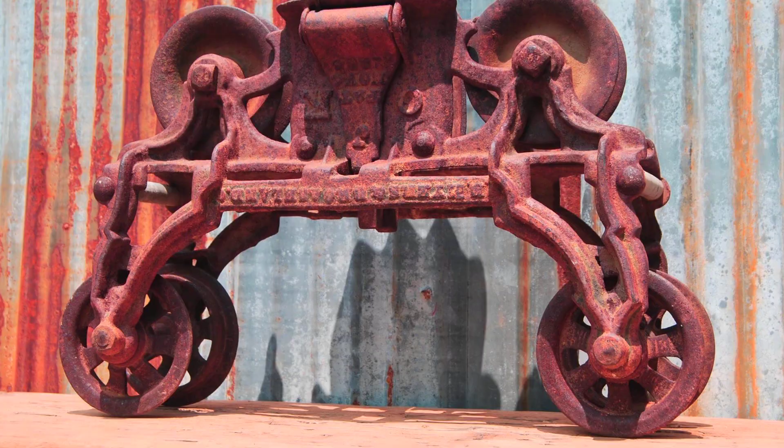It's July 22nd, 1904. In the heart of Gary, Indiana's steelworks, a 300-ton iron crane shudders across its rails, hoisting a cauldron of molten steel, 2 million pounds, burning at 2,800 degrees Fahrenheit, 45 feet above the shop floor. You feel the heat even from below. The air ripples. Trolley wheels hammer overhead, rivets straining.

Without warning, something snaps, a groan, then a roar. The load drops. In seconds, incandescent metal floods the floor, swallowing men with nowhere to run. 22 gone, 48 more burned or broken. The Iron Beast was built for progress, but one glitch turns it into a weapon. How did a machine meant to fuel entire cities become the deadliest thing in the mill? And why did anyone stand beneath it at all?

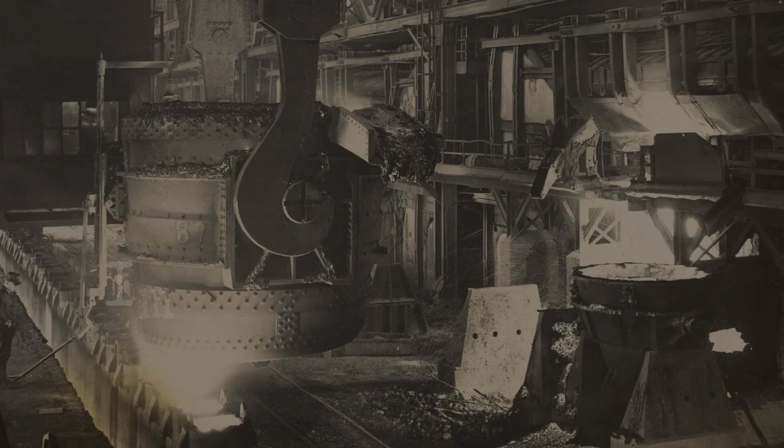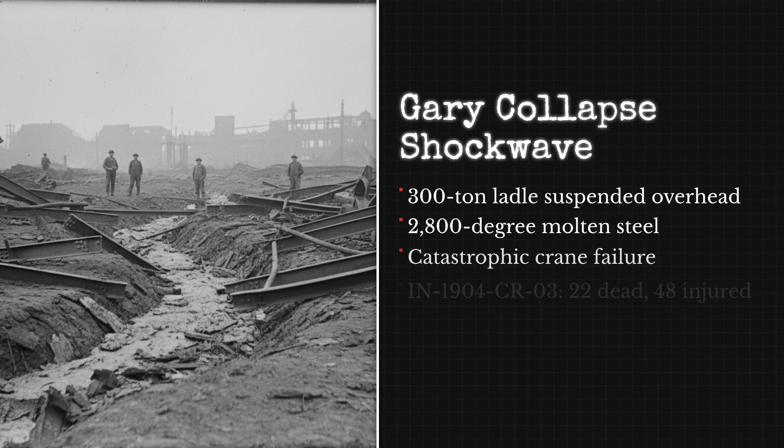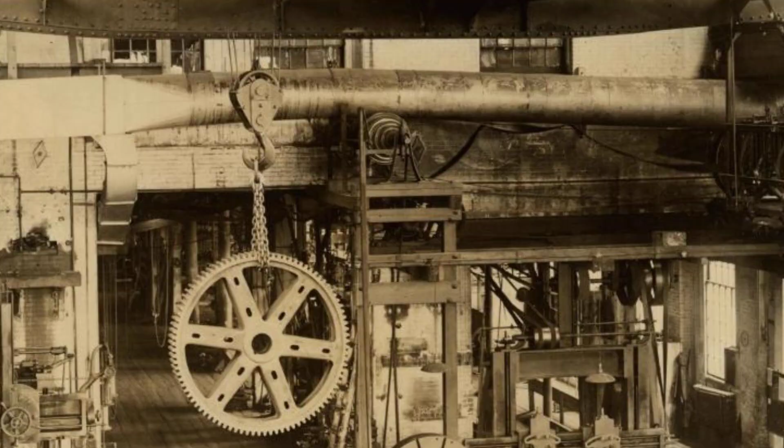A 300-ton ladle, holding 2 million pounds of molten steel at nearly 2,800 degrees, hung 45 feet above the Gary Mill floor. On the day the crane failed, the official record IN-1904-CR-03 counted 22 dead and 48 injured. The floor became a scorched wasteland, concrete shattered and blackened where the steel poured out. The crane, designed as the mill's backbone, became the instrument of disaster in seconds.

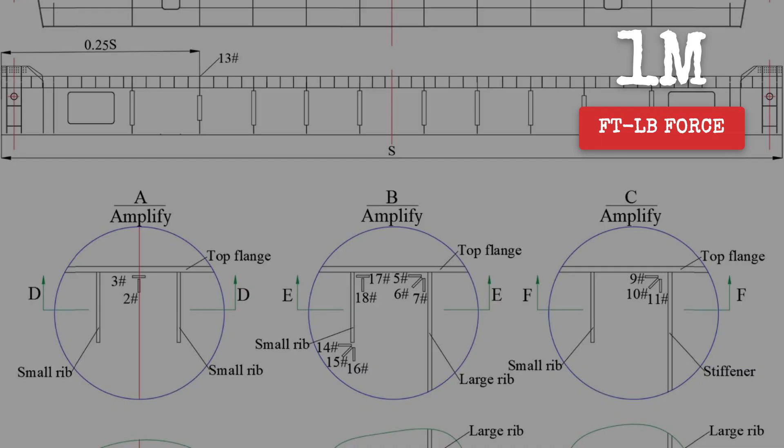Trust in machines was a necessity, not a choice. Early 1900s Iron and Steel Institute reports are full of numbers: 80-foot booms, 60-foot swing radii, cables thick as a man's wrist. But when the Gary crane collapsed, those statistics became flesh and blood. The board's calculations, published in June 1905, measured the ladle's fall at over 1 million foot-pounds of force, the impact of a small artillery shell, unleashed on a crowded shop floor.

There was no warning. The only sign was a groan from the boom, described by one survivor as the whole building taking a breath. The latch, worn by years of heat and vibration, failed. The load shifted. The crane's safety factor, set at 1.5, was never meant for such a surge. Riveted joints, 3/4 of an inch thick, ASTM A7 steel, sheared instantly. Rails buckled, trolley wheels jumped track, and the molten steel crashed down.

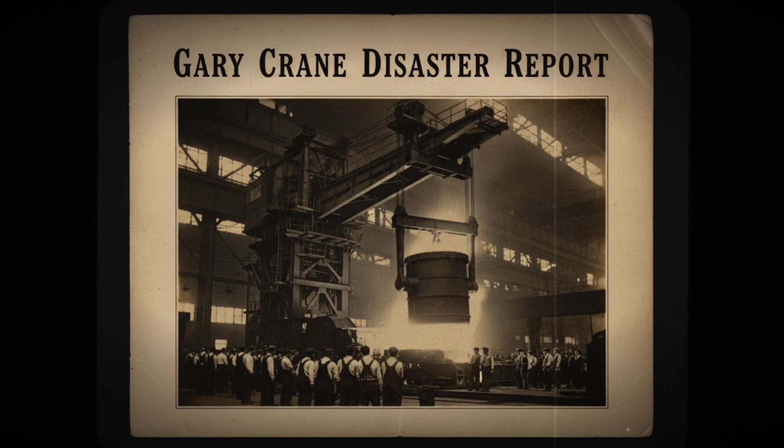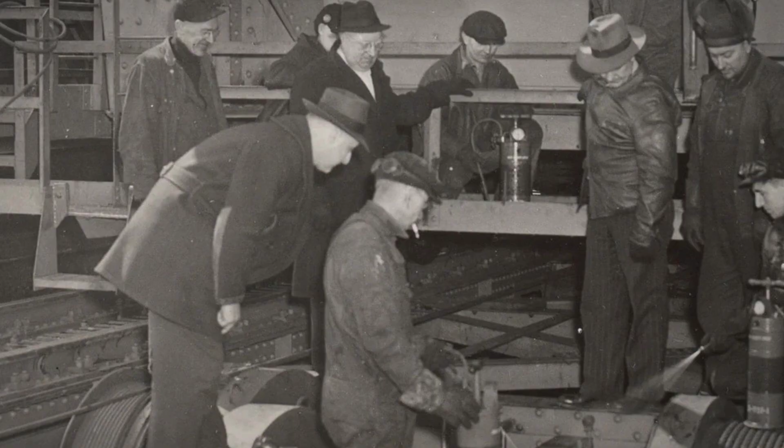The Gary report is relentless in its detail. Every casualty is listed: name, age, position, cause. The heat alone burned men 20 feet away. For those beneath the ladle, there was no escape. The casualty table from IN-1904-CR-03 stands as a grim ledger, each line a life ended or forever changed.

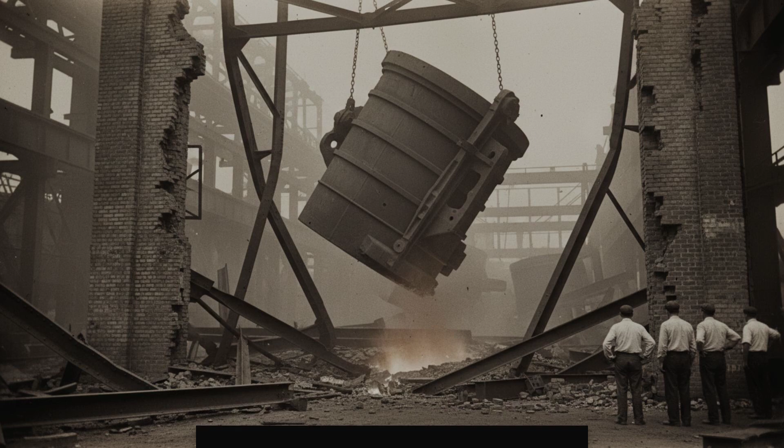John E. McDonough, first investigator on the scene, wrote, 'The iron had no mercy. It moved like a river, but it burned everything it touched.' His words, preserved in the board's annex, capture the aftermath with a clarity that leaves nothing to the imagination. Steel meant for bridges and railways instead erased lives in an instant.

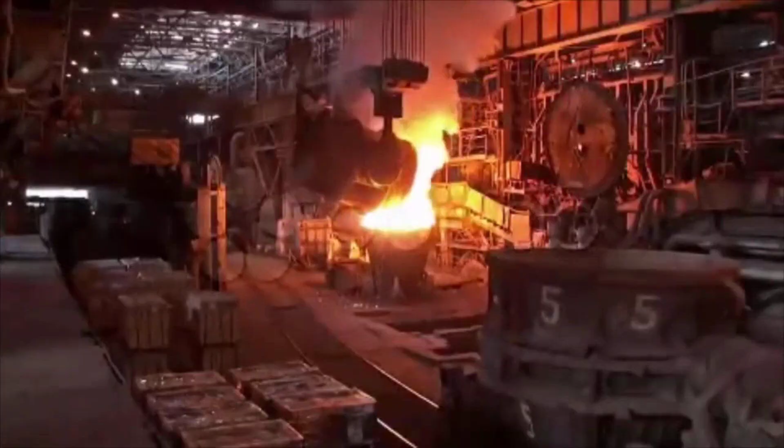Why did so many stand beneath the Iron Beast? The mill's rhythm demanded it. Production never stopped. Every minute brought a new pour, a new rush. The men trusted the crane because they had to. There was no other way to move that much steel, no other way to feed the city's hunger for rails and beams. The cost of progress was measured not just in tons, but in bodies.

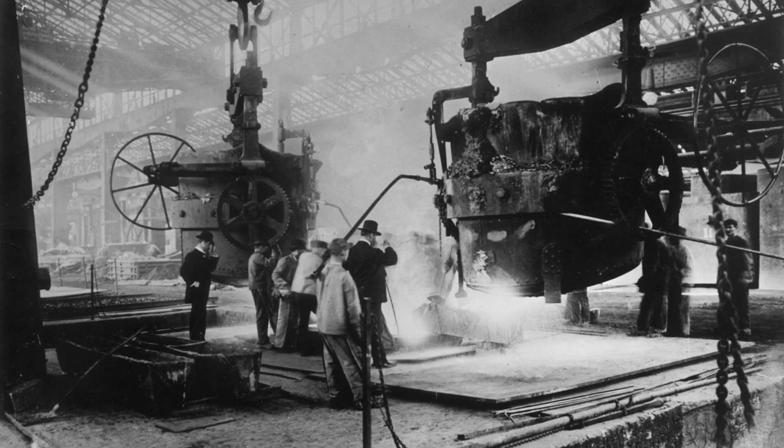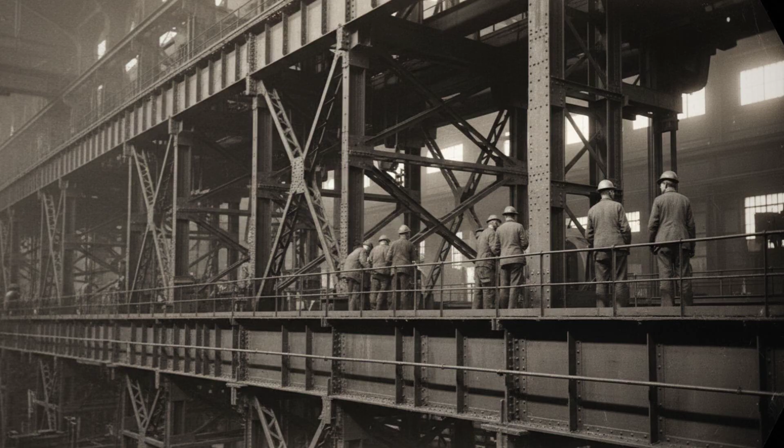The ladle crane dominates the casting bay, an iron bridge spanning wall to wall, built for one purpose: to move staggering weight through a furnace-bright world. Its structure is as straightforward as it is unforgiving. The gantry, fixed rails bolted high above the mill floor, runs the length of the bay. Each rail is riveted steel, every joint a test of time and heat, each seam a silent question mark.

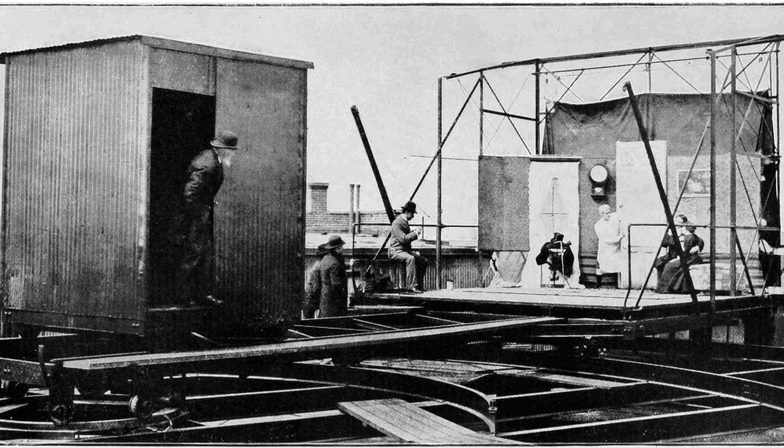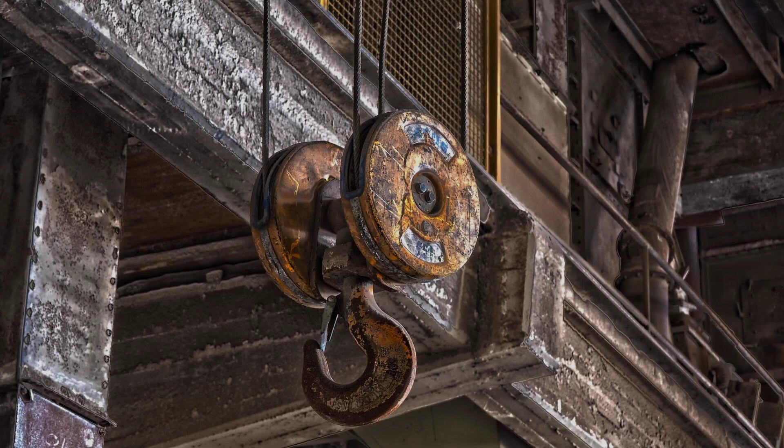On these rails rides the bridge, a lattice of girders and trusses, sometimes stretching 80 feet, fashioned from wrought iron or early structural steel. Engineering drawings from 1888 to 1905 show a patchwork of plates and angles, every piece held by hundreds of hand-driven rivets, each one a potential fault line. Suspended from the bridge, the trolley glides back and forth, its steel wheels as thick as a man's arm. Hanging below, the boom, a braced vertical frame or massive arm, ends in the hook. That hook, a single curved claw of steel, is the last defense between the ladle and the men working below.

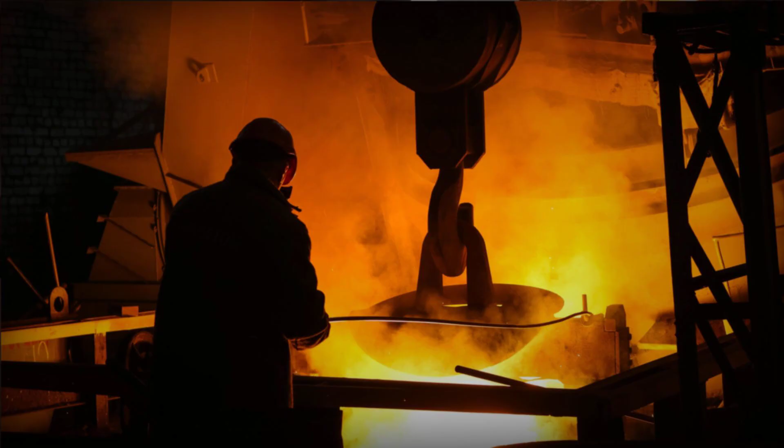In some mills, the hook alone weighs more than a ton. Its job: cradle the ladle's trunnions, tilt, and pour. The ladle itself is a fire brick-lined cauldron, holding up to 300 tons of molten steel, glowing at 2,800 degrees Fahrenheit, hot enough to vaporize water, to ignite clothing from 20 feet away.

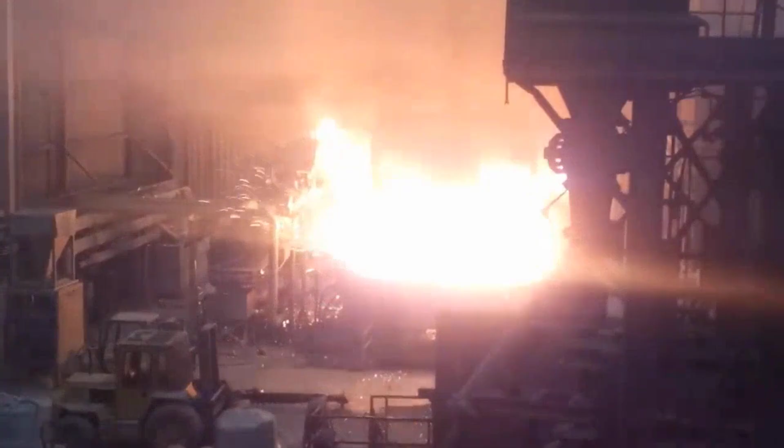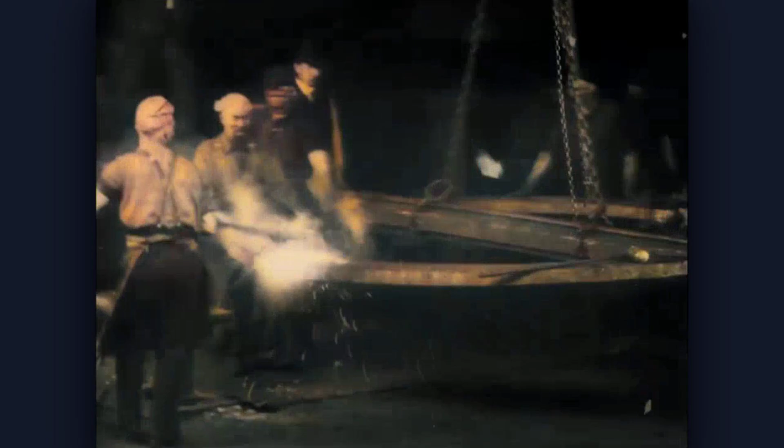The true hazard is not just the weight, but the heat envelope. Every inch of the crane exposed to the ladle's radiant energy is slowly softened, annealed by cycles of expansion and contraction. Steel expands nearly half an inch per 100 degrees. A boom might grow and shrink by several inches in a single shift, loosening rivets and opening seams. The Iron and Steel Institute's 1905 supplement notes that, after a year, main bridge members could sag by an inch from thermal cycling alone. Material choices were dictated by cost and availability.

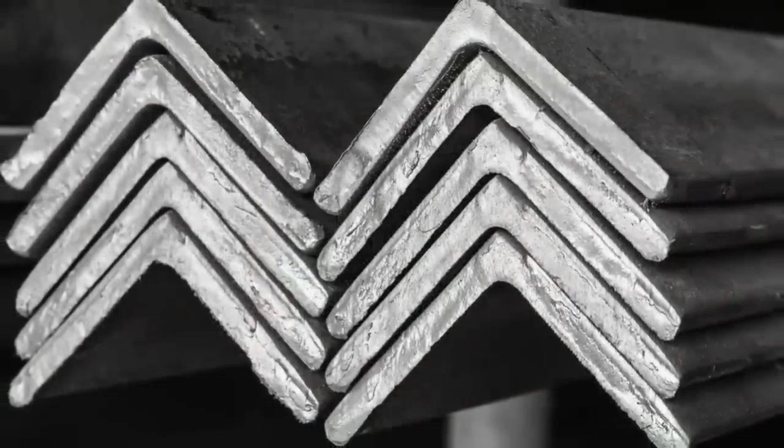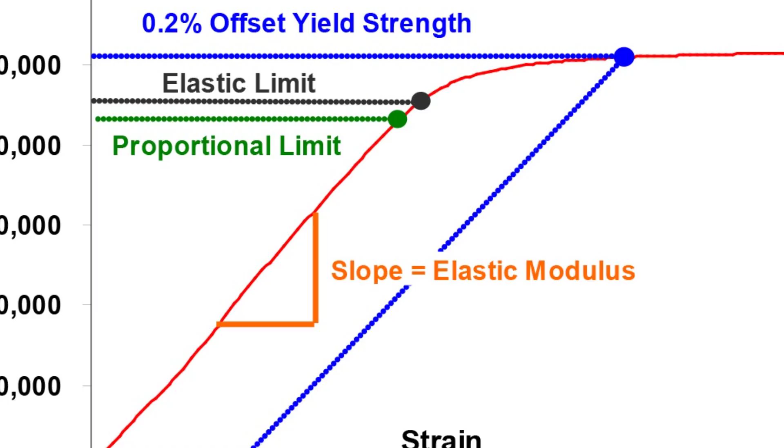Early cranes used wrought iron, prone to splitting under repeated stress. By the 1890s, open hearth steel became standard, but even the best ASTM A7 steel struggled against constant heat and vibration. Safety factors were set at 1.5, but that margin shrank with every swing, every shock, every misaligned ladle.

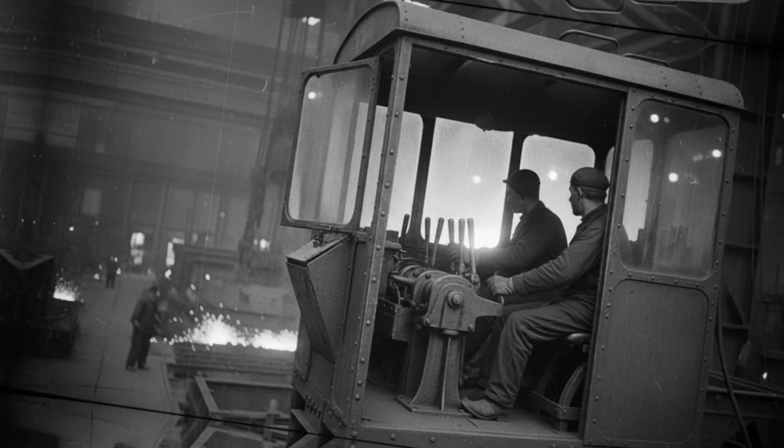In the open hearth mill, the crane never rested. Operators sat in glass-walled cabs, trusting rivets and hope. The iron beast could move more steel in an hour than a foundry crew once managed in a day, but every link, rails, bridge, trolley, boom, hook, rivets, was a point of failure, each detail a blueprint for disaster.

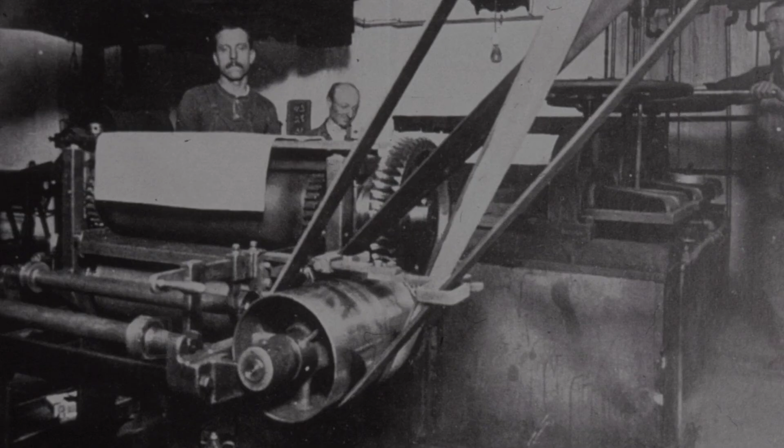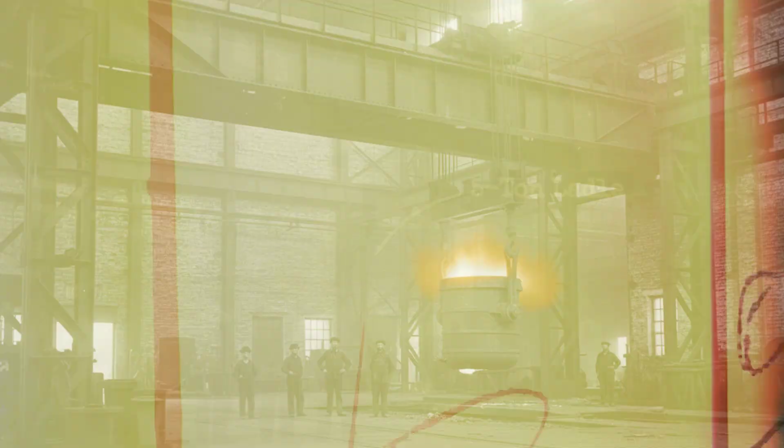December 2nd, 1889. Homestead Steelworks, outside Pittsburgh. The open hearth mill thrums with the pulse of industry, hydraulic pumps, the hiss of molten metal, the clang of iron. Overhead, an 8-ton crane, run by water pressure and muscle, hoists a 5-ton ladle filled with steel at 2,800 degrees Fahrenheit. The lift climbs 30 feet, 3 stories above the floor, suspended by ironwork most men trust without question. That morning, 7 workers will not return home.

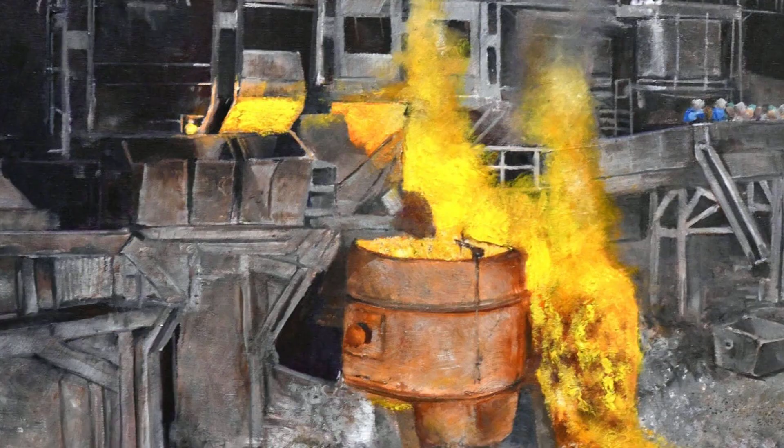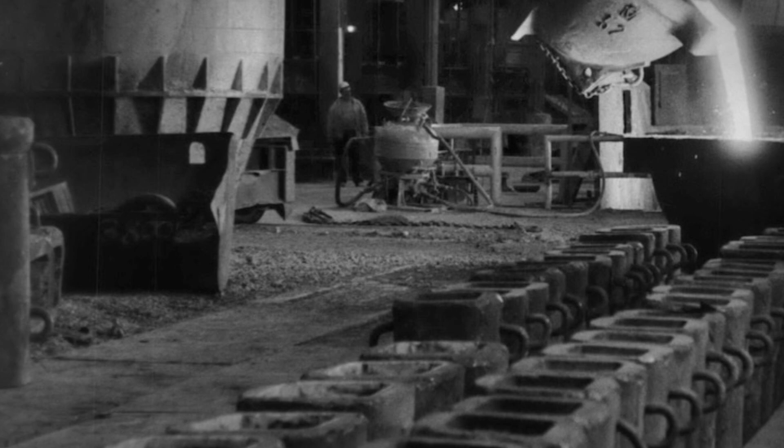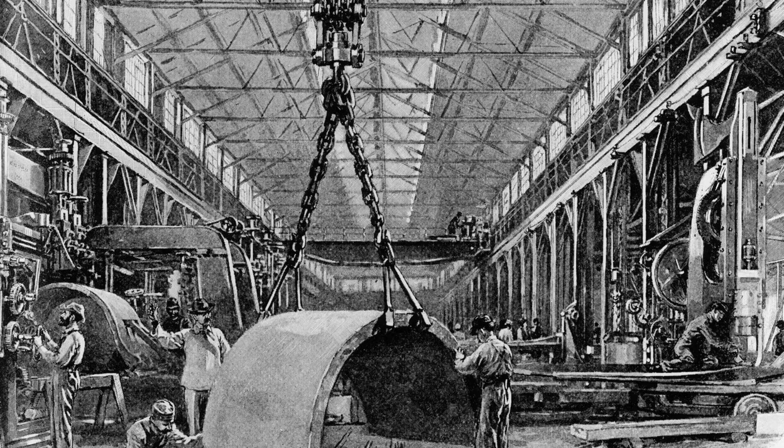The accident struck in seconds. A sharp crack like a gunshot split the air. The crane's arm failed, the boom twisting as rivets snapped. 5 tons of molten steel dropped 30 feet, bursting across the shop floor. The heat vaporized boots and clothing in an instant. 7 men died where they stood. Others suffered burns so severe that even Pittsburgh's best doctors could do little.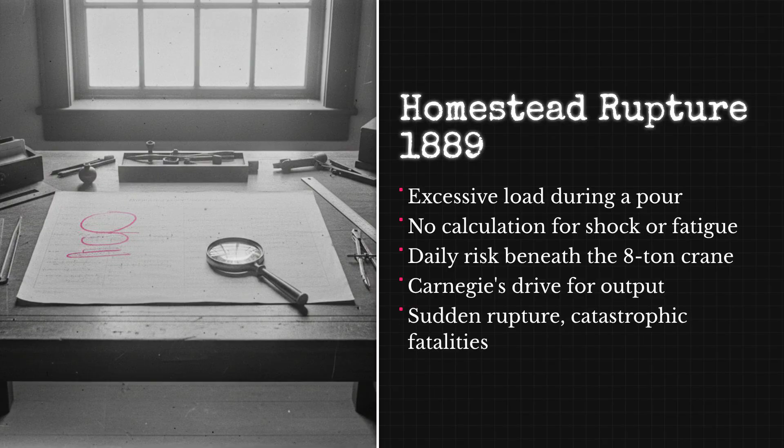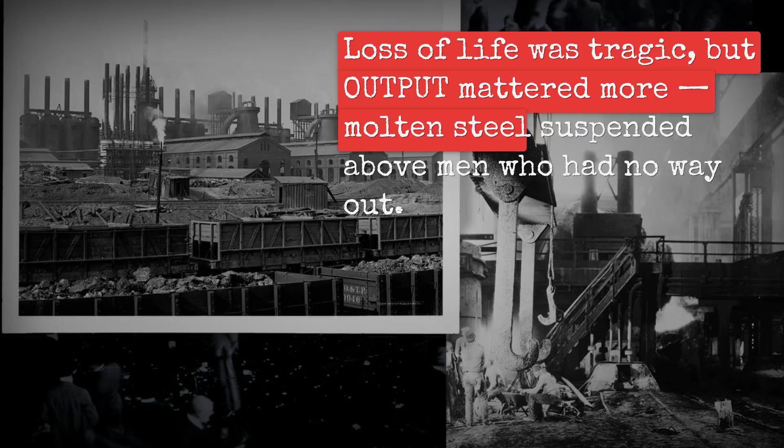The Institute's summary is blunt. Excessive load during a pour. No mention of fatigue. No calculation for the shock when a swinging ladle suddenly stops. Andrew Carnegie's response, captured in company letters, was to restore production as soon as possible. Loss of life was tragic, but output mattered more. The safety committee checked the hydraulic system, not the crane's design. No one asked about rivets, heat, or the flexing boom. The mindset was static. If the chart said it would hold, that was enough. Homestead's rupture was a warning, ignored as the mill pressed on.

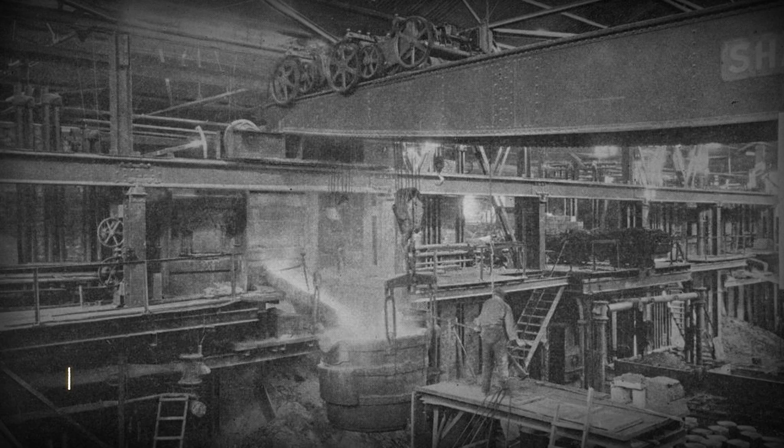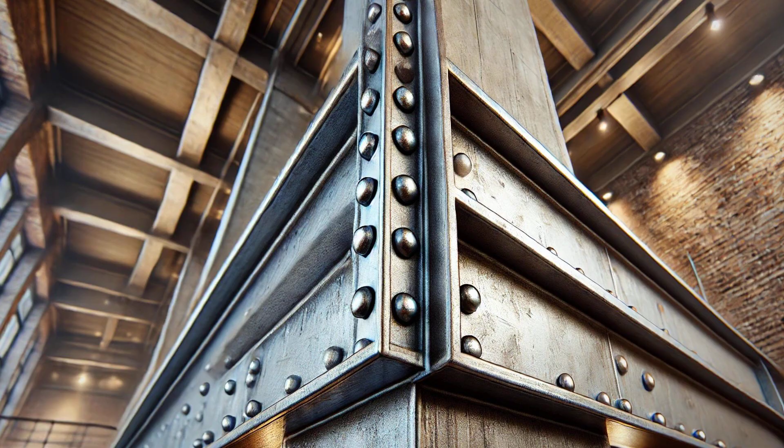March 1893, Sheffield. Inside East Hecla Works, a new 250-ton ladle crane dominated the casting hall, its steel lattice stretching 50 feet above the pits. Every 4 inches along its girders, a rivet held the promise of safety. That day, a ladle filled with 1,600-degree steel rolled overhead. The men below trusted the ironwork because they had no choice.

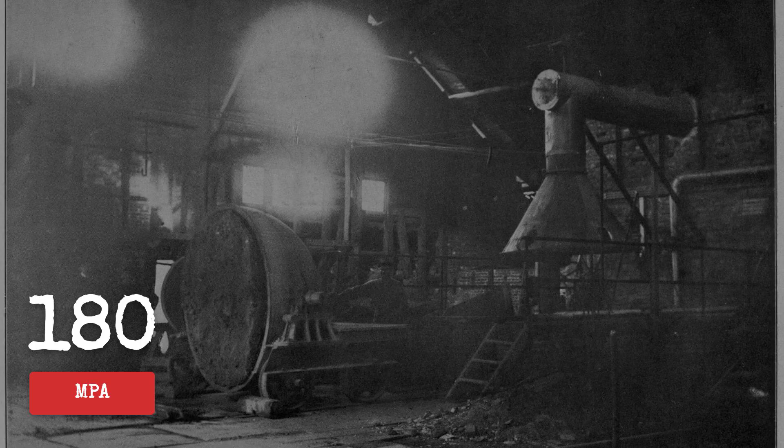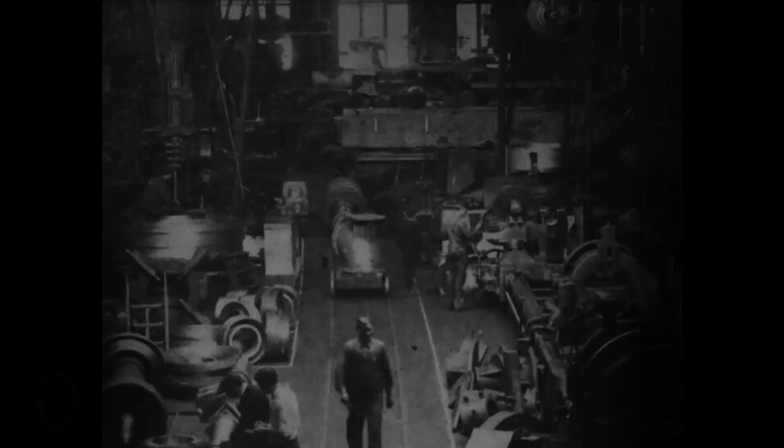The main girder, 10 by 6 inches in section, carried the load across the span. Calculations from the factory inspector's report showed the steel faced 180 megapascals of stress, pushing far past the limits of the material. The first warning came as a low groan, then the sharp snap of rivets shearing in sequence. The boom buckled at mid-span. The ladle crashed down, molten steel flooding the floor. 4 men died, 10 were injured. Their names, recorded in the BSA 1893048 register, remain a stark record of the cost.

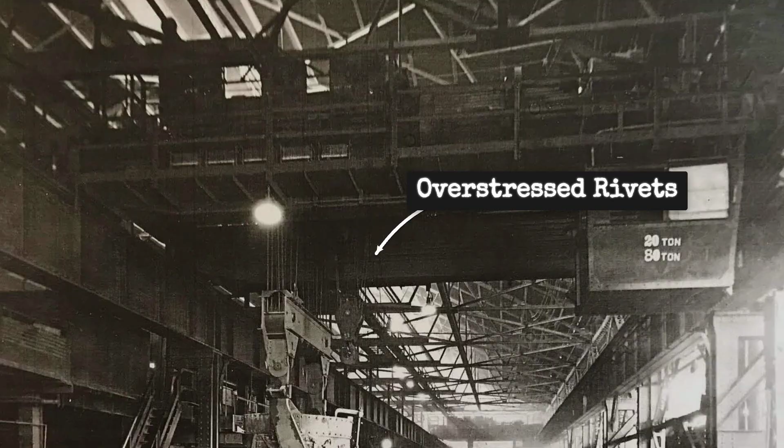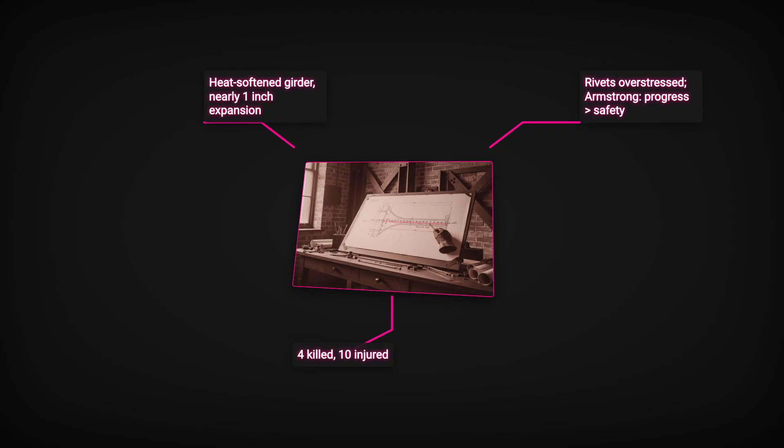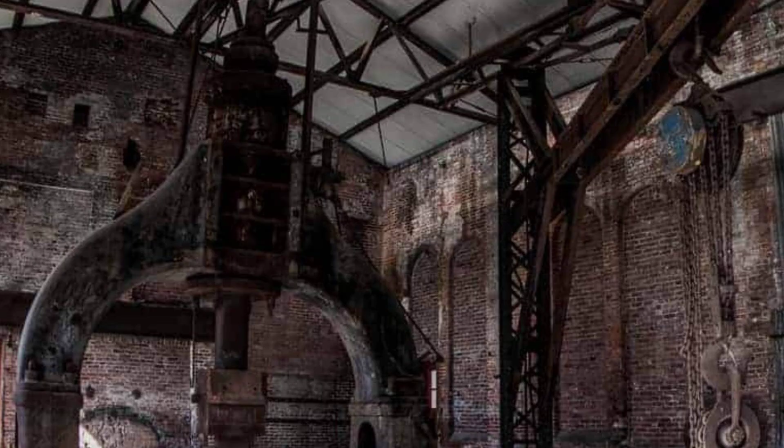Investigators from the Institution of Mechanical Engineers zeroed in on the rivet pattern. 4-inch spacing, double the recommended pitch, meant each rivet carried more load than it should. The collapse traced a line along a single row, where heat from the ladle had already softened the steel and expanded the girder by nearly an inch. No one had accounted for the combined effects of thermal expansion and dynamic loading. Fatigue, the slow weakening from repeated stress, went unmentioned. The design shortcut, wider rivet spacing to save time and money, left the structure exposed to failure.

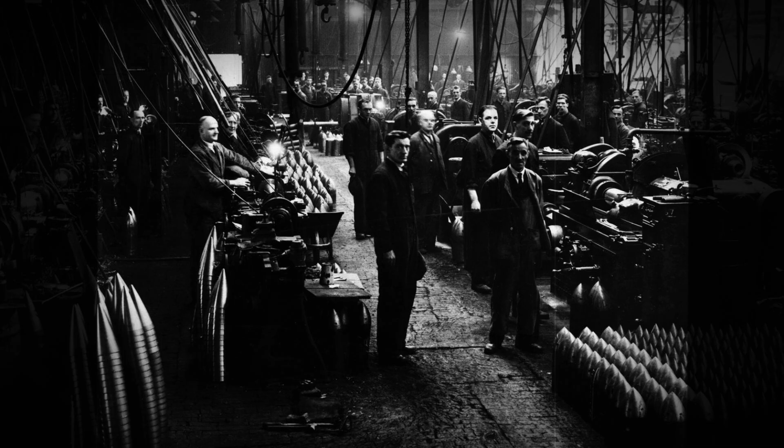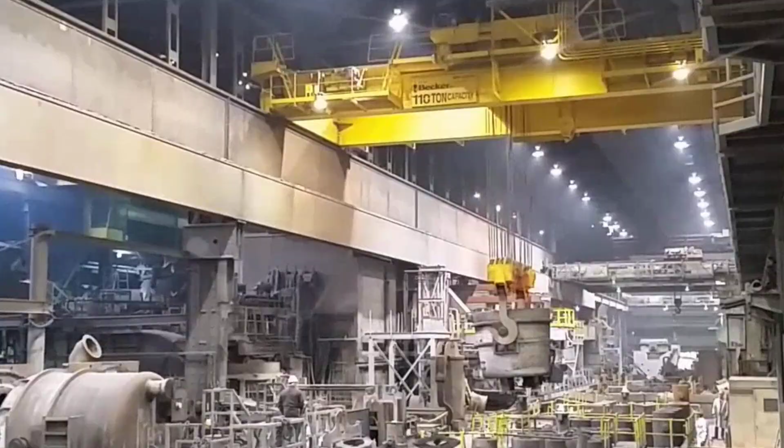A ladle crane in motion carries more than just weight. It holds raw energy, coiled and invisible, waiting to be unleashed. When a 300-ton ladle moves at just 4.5 meters per second, a brisk walking pace, the numbers become staggering. The kinetic energy that builds inside the steel, the rails, and the cables is not a theoretical hazard. It's a real, measurable force.

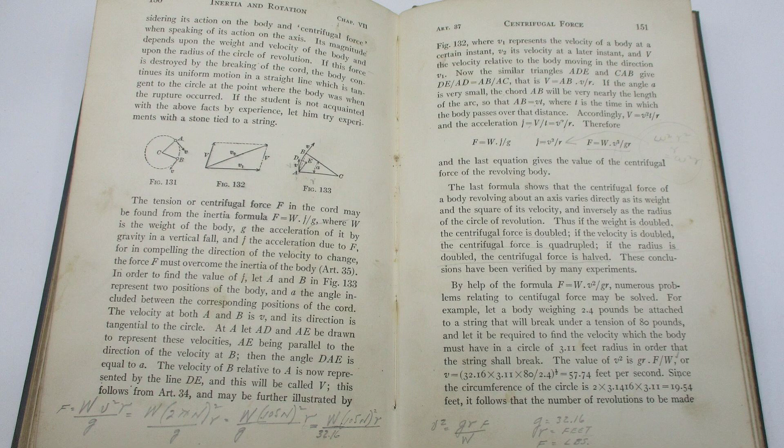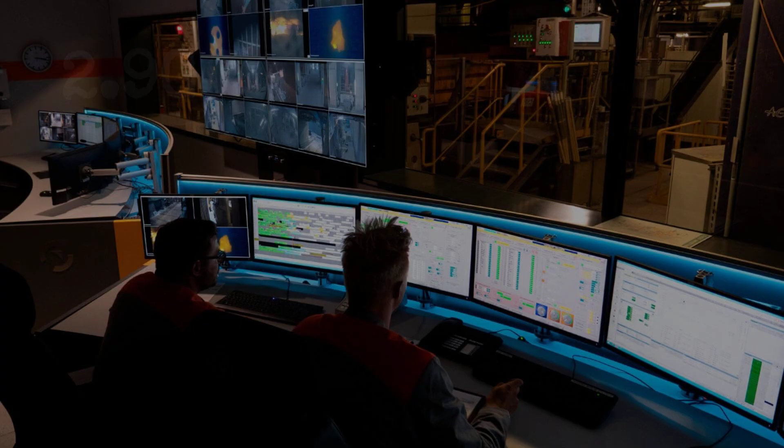The 1905 issue of American Machinist laid out the formula, simple and chilling. Kinetic energy equals 1/2 the mass times the velocity squared. For a 272,000 kilogram ladle, 300 tons, swinging at 4.5 meters per second, the result is 2.9 billion joules. That's more energy than you'd find in 700 kilograms of TNT. In plain terms, the Iron Beast becomes a moving bomb, its destructive power determined not just by gravity, but by speed.

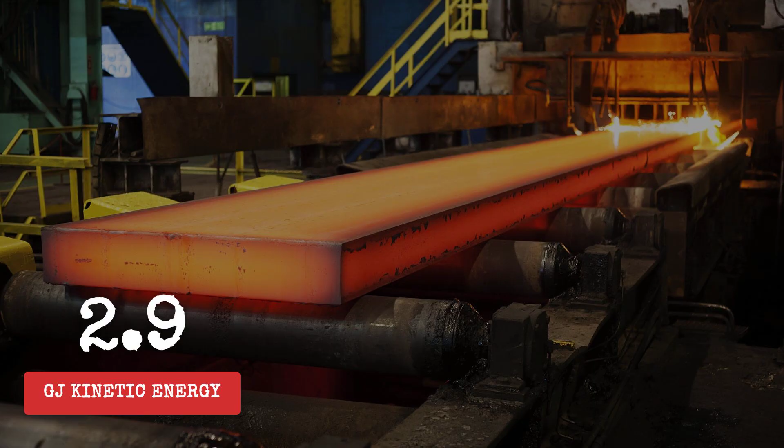But the physics doesn't stop with movement. Heat seeps into every bolt and beam. Steel expands when it's hot. The thermal expansion coefficient for structural steel is about 12 millionths per degree Celsius.

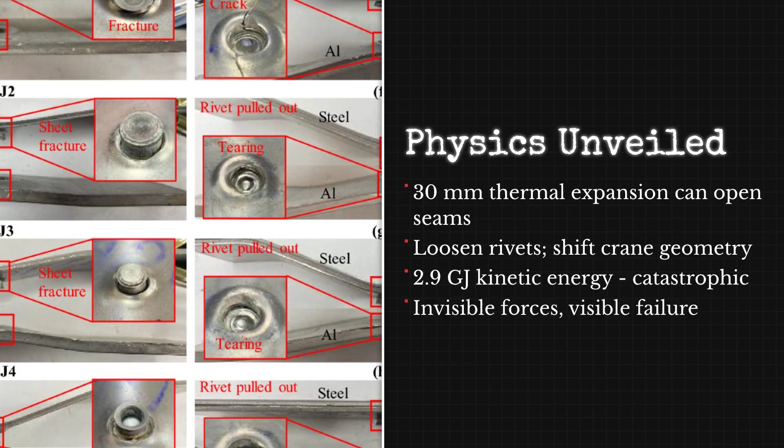The expansion is slow, but relentless. Every cycle, every pour, the structure grows and contracts. Over time, these tiny shifts become gaps, and those gaps become cracks. No static calculation can capture this creeping threat.

What does it mean for a crane to carry the energy of a battlefield shell, or to grow and shrink with every shift? It means that safety factors, set by engineers in quiet offices, become meaningless in the heat of the mill. The Iron Beast is never truly at rest. Its mass, its heat, and its velocity create a system always on the edge of control.

The men below might trust the numbers, but the numbers are only as good as the last calculation. When a latch fails or a rivet slips, the unleashed energy is instant and absolute. The ladle doesn't just fall, it detonates, pouring steel and shock through everything in its path. The physics is unforgiving. The only question is when the next calculation will fall short.

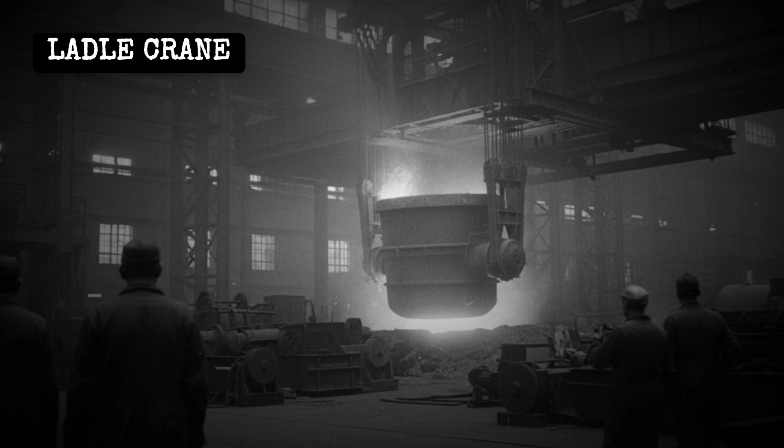Across 3 decades and 2 continents, the same pattern repeated itself. No matter the country, no matter the size of the mill, the ladle crane was both the pride of the works and its most unpredictable threat. Reports from the Iron and Steel Institute, the British Factory Inspectorate, and the Indiana State Board all describe the same sequence.

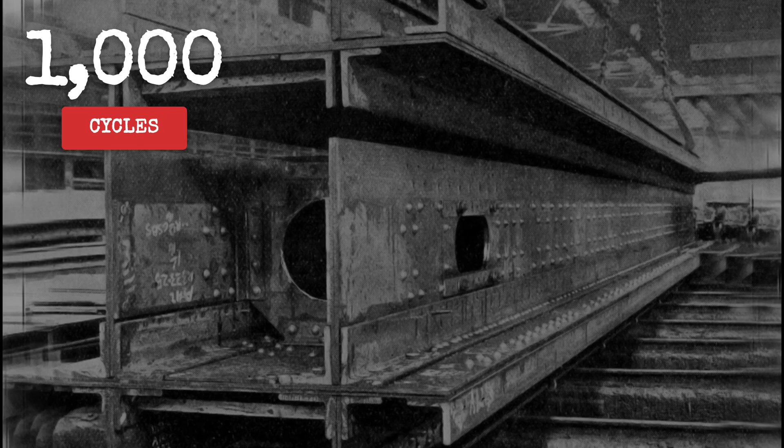A boom, already weakened by years of heat and vibration, gives a warning groan. Rivets, spaced too far apart or fatigued by 1,000 cycles, snap in rapid succession. The load shifts, the structure fails. Molten steel, always at the edge of control, finds the smallest opening and pours through it.

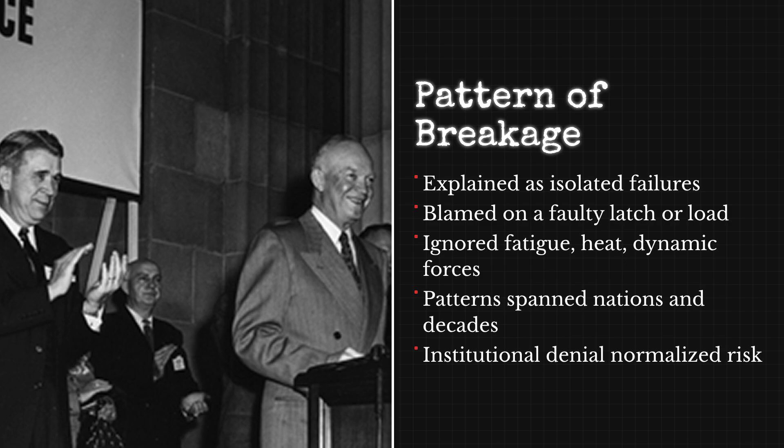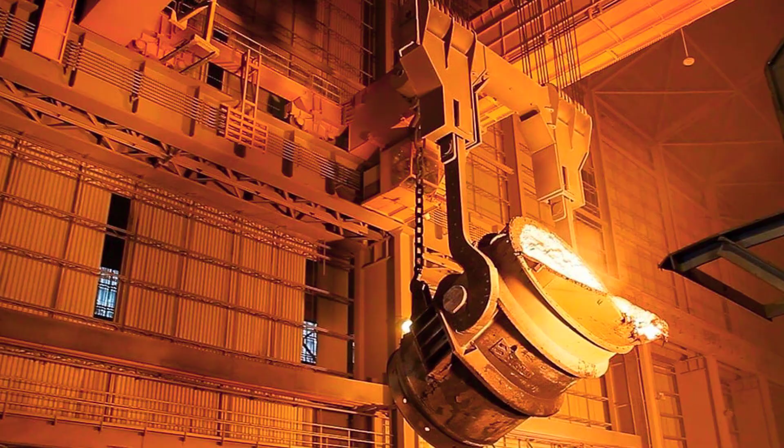Each investigation tried to explain the collapse as an isolated failure, a faulty latch, a misjudged load, a worn cable. But the records reveal something deeper, a mindset that treated each crane as a static structure, its limits defined by yesterday's calculations and the hope that nothing would go wrong today. This is risk normalization, the slow, invisible process by which extraordinary danger becomes routine.

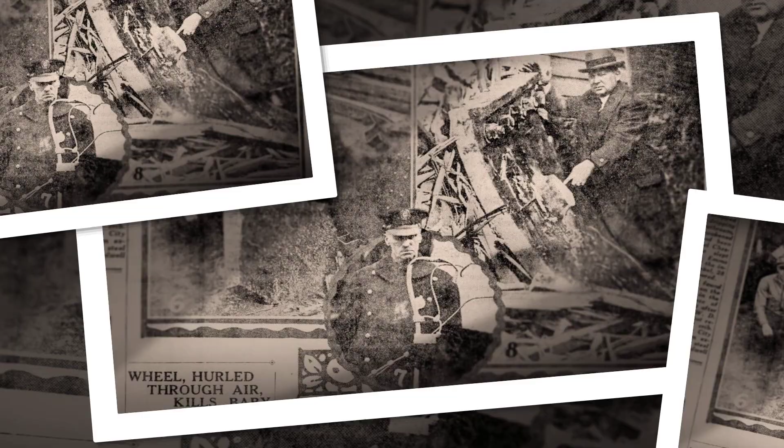The Homestead rupture, the Sheffield collapse, the Gary disaster, each one different, yet all shaped by the same blind faith in numbers and habit. The Iron Beast didn't just fail once. It failed in the same way, again and again, because the system accepted risk as the price of progress.

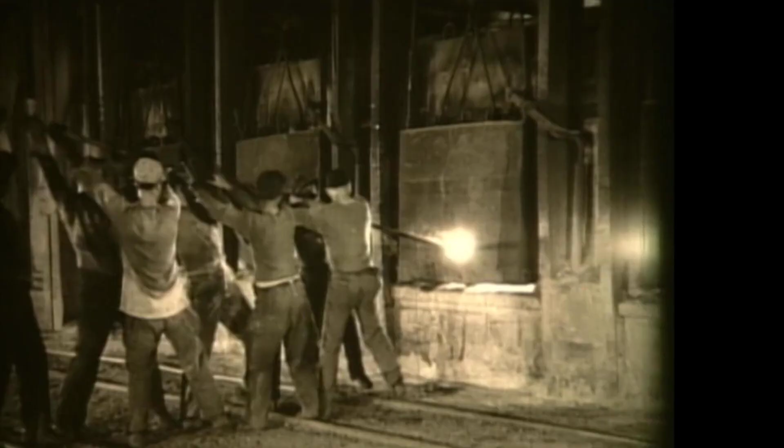Official inquiries into crane failures often missed what now seems obvious. After the Gary disaster, the Indiana State Board of Inquiry combed through every rivet and calculation, yet their report closed with a single damning phrase: no evidence of fatigue.

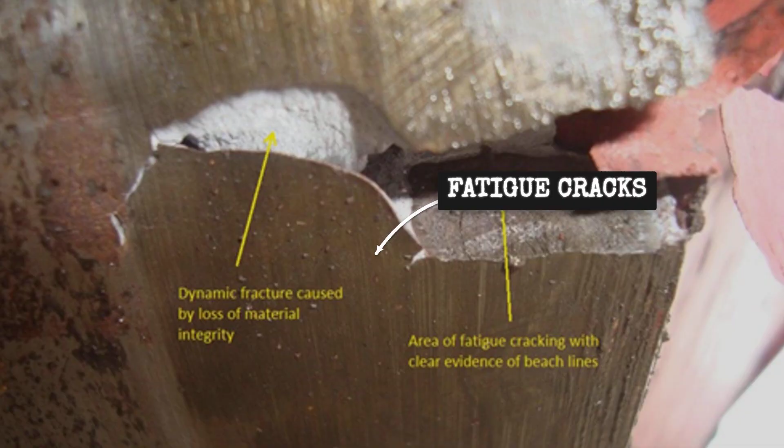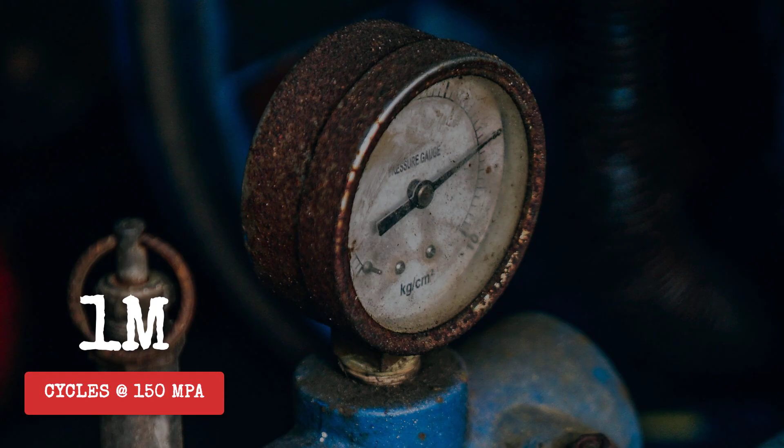The Royal Commission on British Steel Plant Safety, reporting in 1912, ran fatigue tests on similar riveted joints. Their results were clear. At 150 megapascals, failure could occur after 1 million cycles, well within the working life of a crane in a busy mill. Yet the Gary board dismissed fatigue as a theoretical concern, not a real-world threat.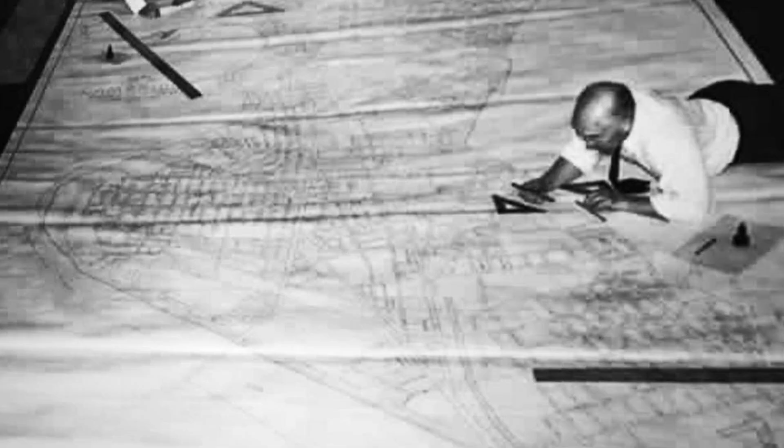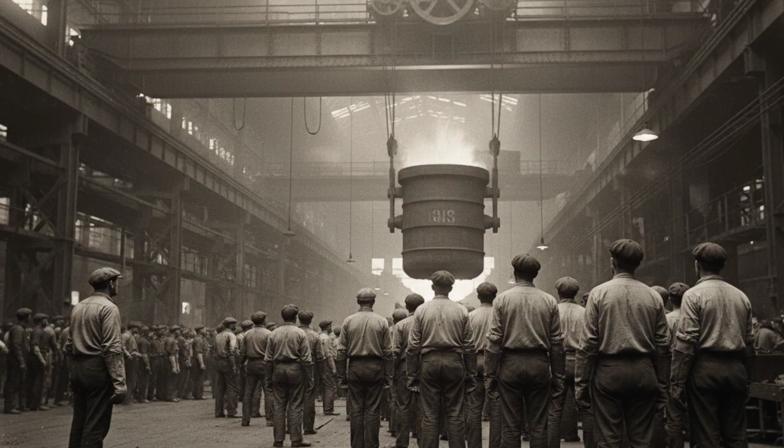The absence of formal standards left engineers to trust their instincts, and the official record closed the door on a line of inquiry that could have saved lives. Only later would these missed warnings justify the push for mandatory fatigue inspections and stricter codes, but for those working beneath the Iron Beast, the danger remained unspoken, hidden in the seams.

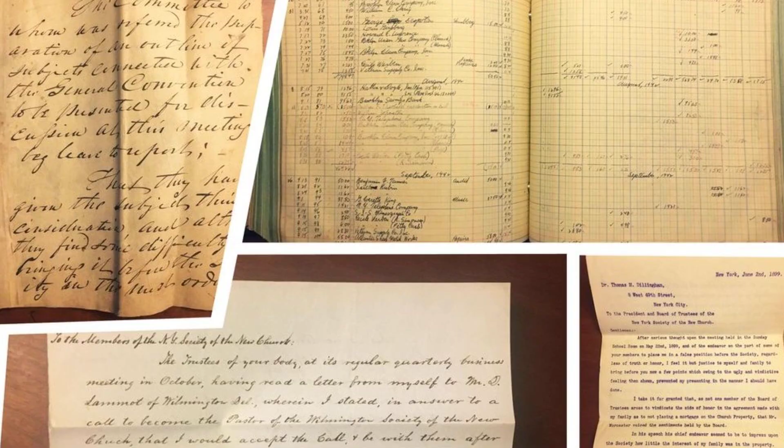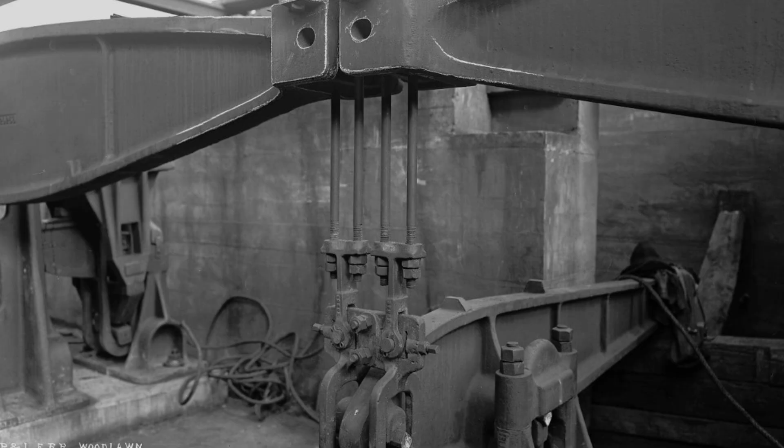Regulation came not as a single breakthrough, but as a series of mandates forged in the aftermath of catastrophe. In 1915, the American Society of Mechanical Engineers met in New York, their minutes echoing the failures at Homestead and Gary. They set a dynamic load factor of 2.0 for ladle cranes. No longer would static calculations protect workers from the force of swinging steel. Every crane over 150 tons now required mandatory fatigue inspections, forcing engineers to search for cracks before disaster struck.

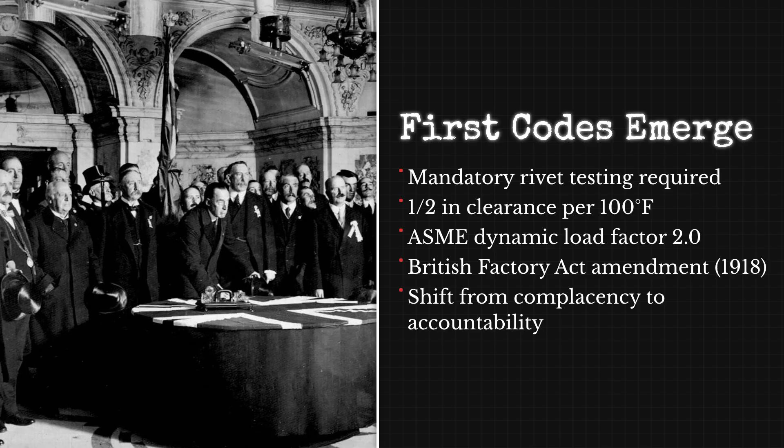Meanwhile, Britain's 1918 Factory Act Amendment responded to the collapse at Sheffield. Lawmakers wrote in mandatory rivet testing and required a half-inch clearance for every 100 degrees of heat, recognizing that steel expands and molten metal reshapes its container. Hansard debates from that year reveal Parliament's urgency, haunted by lives lost to overlooked seams. For the first time, law treated the Iron Beast as a threat, demanding vigilance and rules written in steel.

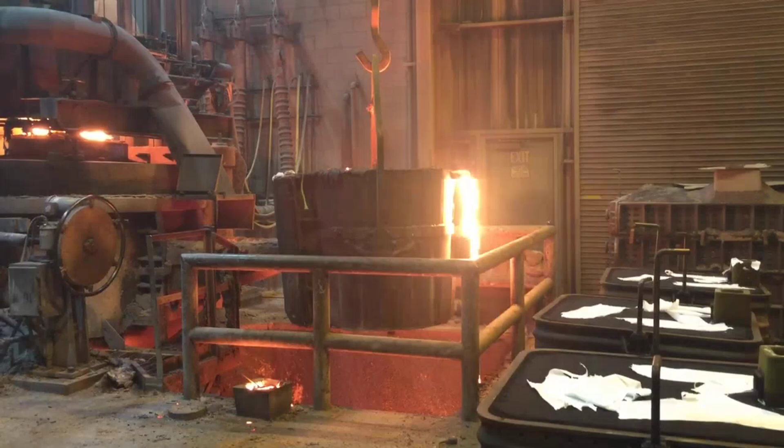Today, steel still flows overhead, now guided by digital sensors and redundant safety systems, not just rivets and human instinct. Yet every time 1,000 tons hang above a shop floor, the old equation returns. Ambition versus risk, precision against gravity. The Iron Beast may have changed its shape, but the stakes, measured in lives and molten metal, remain as real as ever.